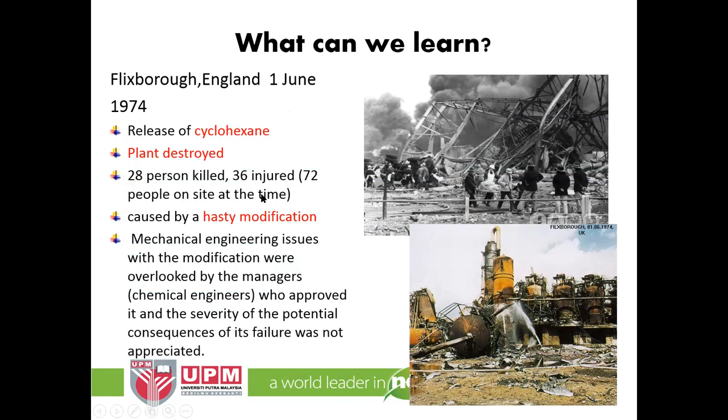So what can we learn from most of these historical cases? One is the destruction or damage that it caused - a lot of cost in terms of damage to factories, buildings, and the environment, as well as killing lots of people. Most of these produce a very hazardous event, such as producing flammable gas, and that mixture can ignite fire and cause more blasts.

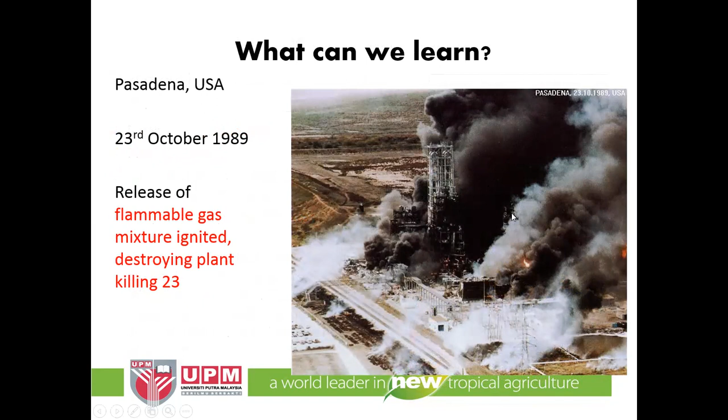For example, we have Bhopal, India - this caused a lot of people killed during this event, about 3,500 people killed. Some reports say 35,000. I'm not so sure which one is true, but of course it caused a lot of effects to the life of the people.

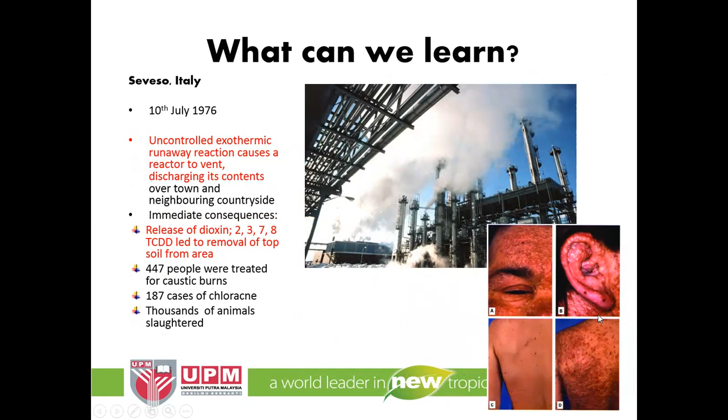And it can also cause disease. For example, the release of dioxins can cause chloracne or skin disease to those who are affected by the event from the chemicals that have been produced. So what is CIMAH for? Basically, CIMAH is to control major accidents from happening.

It protects the workers, it protects the environment, and also it complies with ILO conventions, International Labour Organization, and harmonizes the system of controlling major accidents. So this regulation is very important in terms of that. The objective is to prevent major industrial accidents and to limit the consequences to people, as well as property and environment.

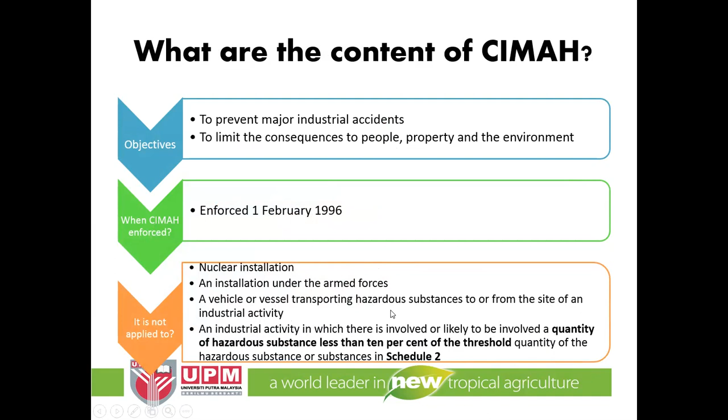This CIMAH regulation is not applied to nuclear installations. It's not applied to installations under the armed forces, as you know OSHA is also not applied for those working in the armed forces. It's also not applied to a vehicle or vessel transporting hazardous substances to or from the site of industrial activities, or an industrial activity involving a quantity of hazardous substance less than 10% of the threshold quantity. So this is also not applied under CIMAH.

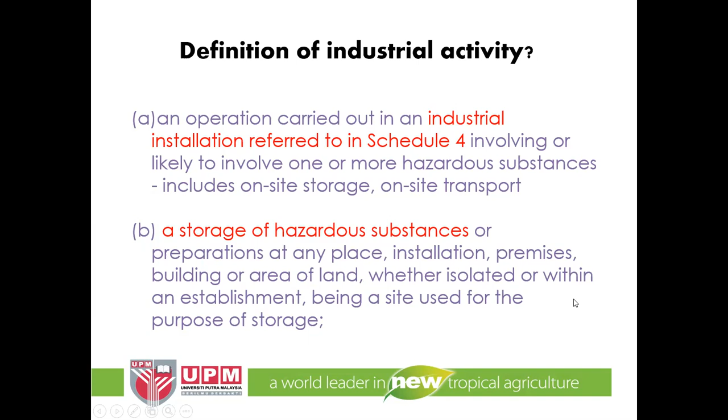So what are the definitions of industrial activity? Industrial activity is an operation carried out in industrial installations referred to in Schedule 4. You can refer back to this Schedule 4 in the CIMAH Act or Regulations. This includes on-site storage and on-site transport, and storage of hazardous substances or preparations at any place, installation, or premises for the purpose of industrial activities.

And then, what are major hazard installations? A major hazard installation is an industrial activity that produces, processes, handles, or disposes of one or more hazardous substances, or a category or categories of hazardous substance, which is equal to or exceeds the threshold quantity.

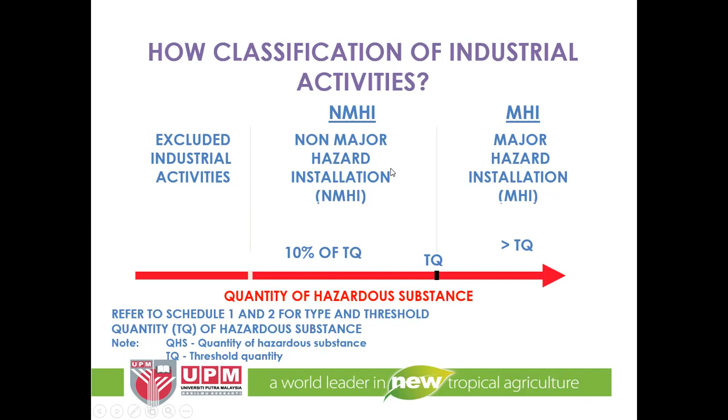In a moment we will look through this. I think I provided it here. So this is actually the definitions of non-major hazard installations and major hazard installations. If you have this activity at 10% of the threshold quantity of the hazardous substance, then we call it non-major hazard installation. But if it exceeds the TQ, or threshold quantity, of the hazardous substance, then we call it major hazard installation. So if it's less than 10%, this is the benchmark - we do not classify that industrial activity as a major hazard installation. All right, so that is the summarized definition.

What is defined by 'site'? It means the whole of an area of land under the control of a manufacturer, anything related to the industrial or manufacturing activity, any area, and also the structure, whether it is floating on water or not. If it's a structure, and it's under the control of the manufacturer, that is the definition of site in the regulations.

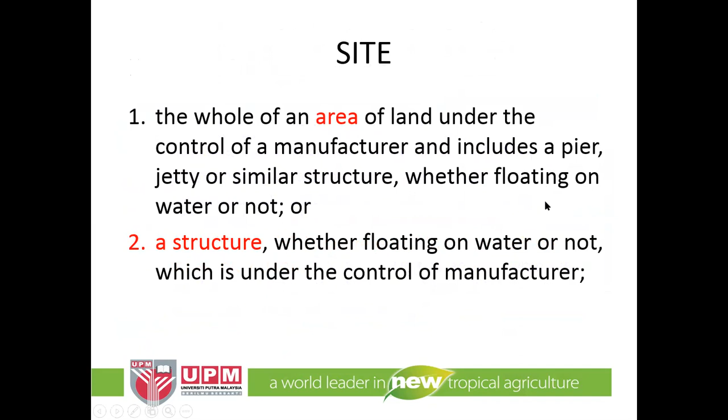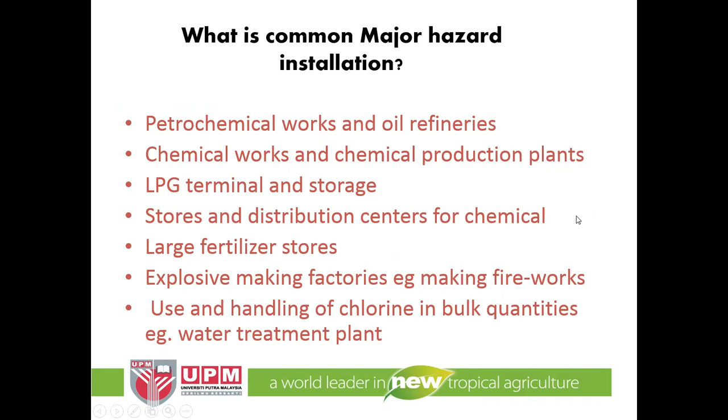Okay, next is what are common major hazard installations? Some examples are petrochemical works, chemical works, LPG terminal and storage, large fertilizer stores, explosive making factories. These are examples of common major hazard installations related to industrial activity, where when you are working, you may be involved in one of these processes.

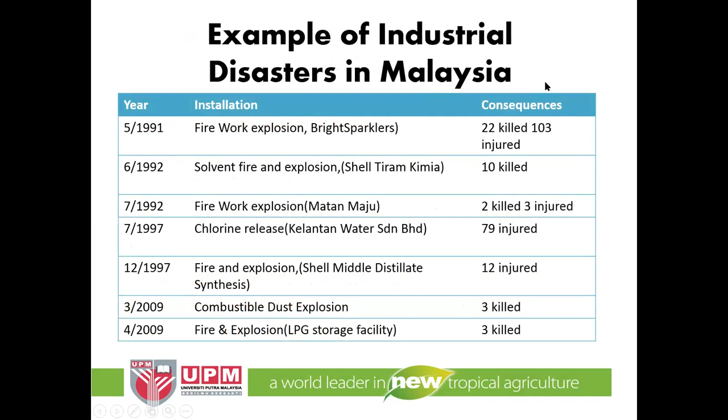And then, examples of industrial disasters in Malaysia - I have listed a few for your reference. You can just Google it and find out the details.

Okay, there are two major concerns in CIMAH. The first one is the type of hazardous substance, and the second one is the quantity. So CIMAH is concerned with the types of hazardous substance or hazardous chemical - if it's toxic, flammable, explosive, or highly reactive. And then the quantity, if it exceeds some threshold value, then you need to apply the regulations.

All right, so obligations of the manufacturer under MHI, or major hazard installation manufacturer - this is mostly for you as those related to the employer or related to the management. You have to notify DOSH for this industrial activity. Basically, you are not doing this yourself - if you have a safety and health officer, they will do this part. But as the human resource or human capital department, you have to understand the process.

This means that if they forgot to notify DOSH, you can remind them, or put it in the agenda of meetings, because you know this is very important and it's an obligation of the employer. So you have to notify DOSH, Department of Safety and Health, of an industrial activity that you have in your company. You have to prepare and submit reports - basically the safety and health officer has to prepare and submit the reports, and also the on-site emergency response plan to DOSH, to keep up-to-date reports, and inform the local authority.

Why do you have to inform the local authorities? Because when anything happens - for example, if you have an accident or an explosion - it will affect people surrounding your company, your organization, your factories, for example.

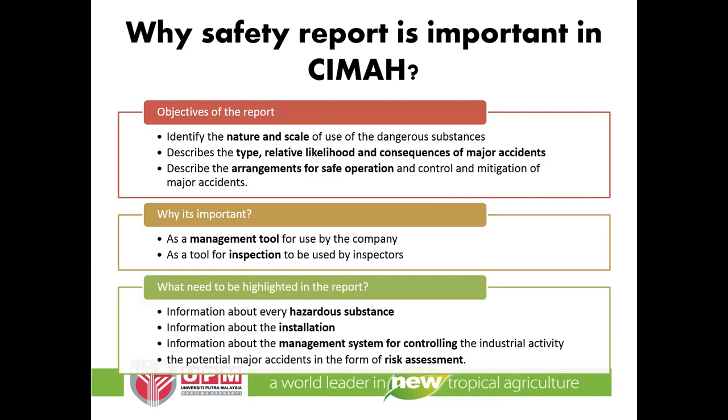Basically, as a human resource, you are not going to do this, but this is under the obligations of the safety officer. But as those who are in the team, you have to also take note of the process or elements of the documents that you have to know.

Demonstration of safe operations for non-major hazard installation. So if you have a process or activity classified as non-major hazard installation, it is defined as when the process has like 10% of the threshold, the TQ, threshold quantity of the hazardous substance. If it's within that 10%, you have to identify the possible major accident hazard.

You have to take adequate steps to prevent the accident, minimize the consequences by having this ERP, do the fire drills, inform everyone, make them alert of the hazard and things like that. Provide at any time the evidence, including the document, to show that you have carried out all of this. You have already prevented the major accident. You have already minimized the risk.

And then you also have to prepare and keep up to date the adequate on-site emergency plan. Because you are the human resource or human capital department, you are responsible for the documentation. You have to make sure everything is documented, because this will help you and the company to support, if anything happens, so that you will not be punished or blamed for not taking extra precautions in the process. That is why documentation, proof, and evidence are very important.

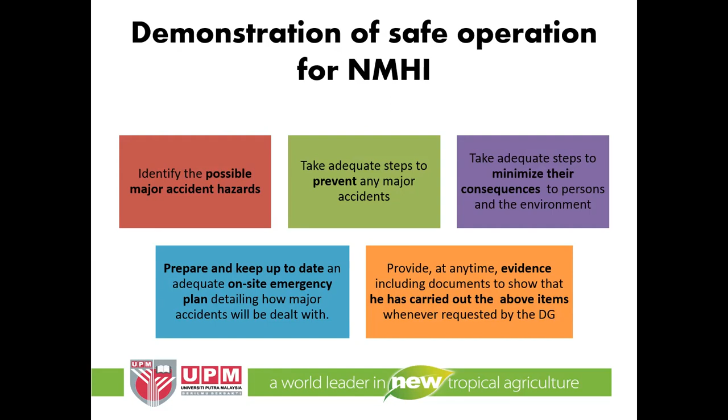And then this off-site emergency response. ERP has two types: the first one is on-site, the second one is off-site. The on-site emergency response plan is within our company, our manufacturing company, our organization. But when you're dealing with off-site emergency response plan, it means it deals with people outside of your company.

So one of them is the local authority. You have to prepare and keep up to date for the local authority, whatever the process in your company. For example, if any hazard or accident happens, who are you going to call? If you are going to call the police, the fire brigade, the local authority, you have to make sure these people are aware of the process, what are their numbers, who are the persons in charge, and things like that.

So you have to make sure that it's properly addressed, and then you also have to plan to deal with emergencies that can cause damage inside and outside the plant. This needs to be discussed within a team in your organization. You have the safety officer, engineers, purchasing department, something like that.

And then you have to plot, or table out all the consequences - how big will be the risk, how big will the impact be if anything goes wrong, and how this will impact the company. So you have to deal with it, and also inform others outside the company, including the JKK of the kampong, the villages, and representatives of the taman or residential areas, to make sure they are involved in the process of emergency response.

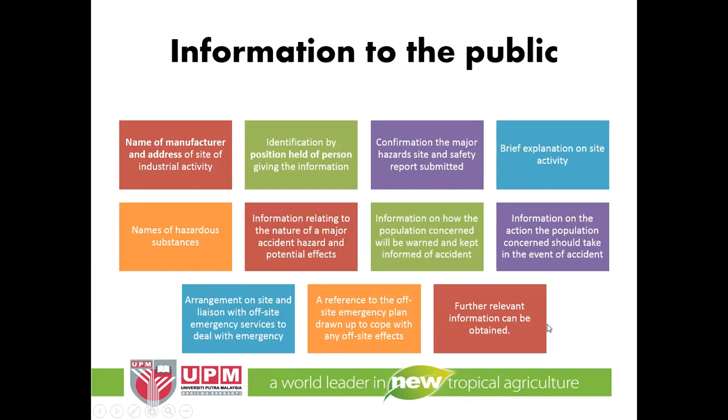Information on the actions the population concerned should take in the event of an accident - so if anything happens, what they have to do. And other types of information, including the names of the chemicals or hazardous substances, or any process in your company that might lead to a major accident. Also arrangements on site and liaison with off-site emergency services to deal with the emergency, and other relevant information obtained throughout the process of major hazard installations.

Notifications - as mentioned, one of the obligations of the manufacturer or organization is to notify DOSH of major accidents or major hazard installations. The manufacturer has to notify the nearest office by the quickest means, and provide information on what the hazards are, what the accident is, what emergency measures have been taken care of, and also fill in the form.

As a conclusion, CIMAH will not totally prevent the occurrence of accidents, but it will minimize them, and it will help you to prevent and mitigate, and help with emergency response plans. That is why it is very important for you to understand these regulations before we move on to an emergency response plan in this course.